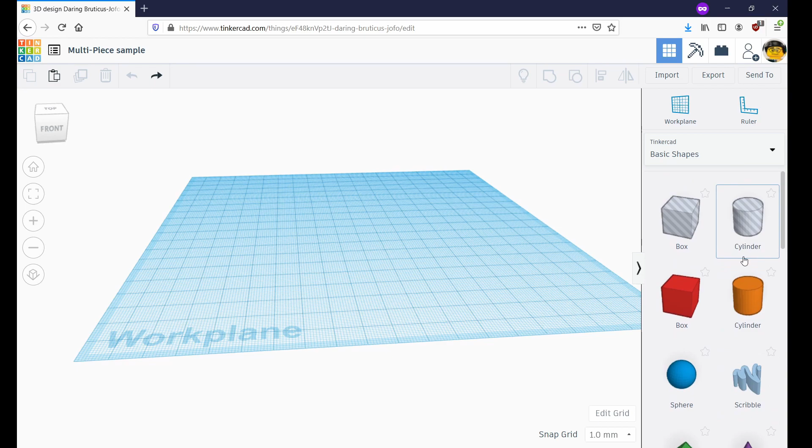This time we're going to start by inserting a cylinder. This cylinder will help me illustrate what we're trying to do today. Now on its own it'll print just fine, but if we decide to rotate this 90 degrees, you'll notice that there is a shadow now on our work plane.

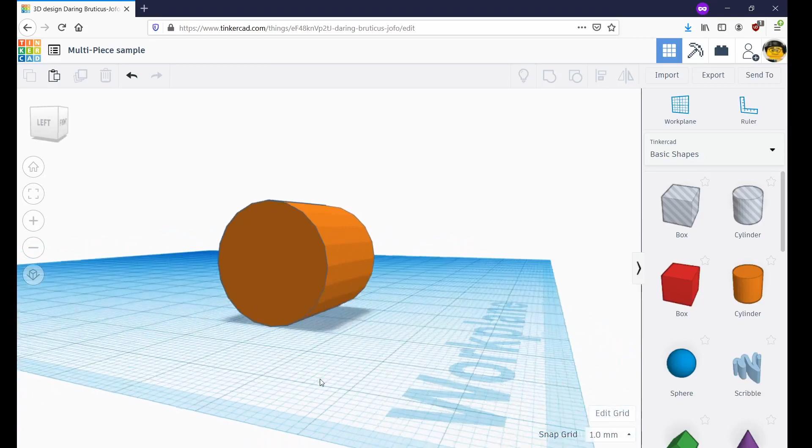This shadow denotes that if we try and print, we'll have some material hanging over. It may be tough for the printer to actually print this accurately. You'll notice the same thing when we insert the sphere. We have a shadow denoting that we have material essentially floating in midair.

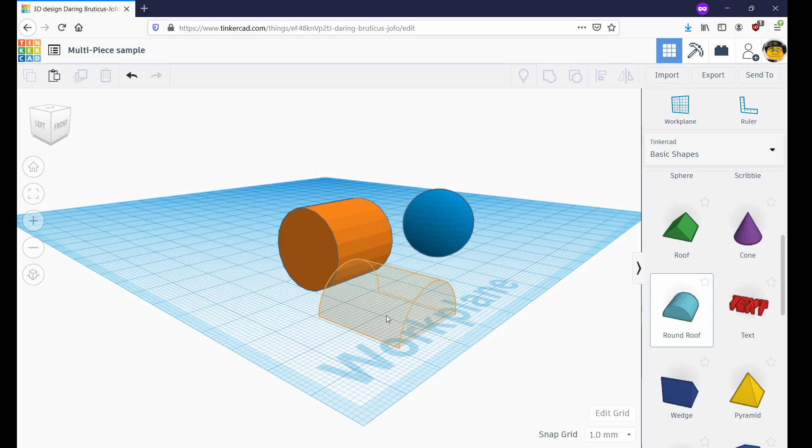The reason we get this is because 3D printers specifically print from the bottom up, one layer at a time, and we want to avoid having those shadows. So one way we can do this is by splitting our objects and then grouping them later on. For example, if I take two halves of this cylinder now, each half will have no problem printing. We just have to figure out a way to put them together.

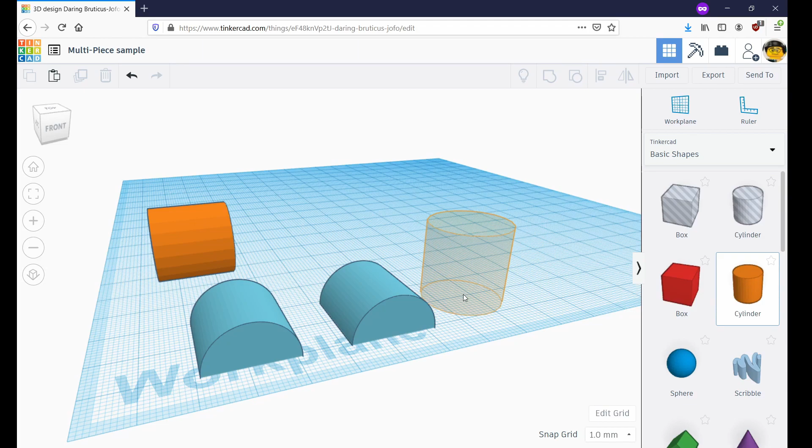The easiest way to do so is by creating an extrusion on one half of the object that will fit inside a hole that we create in the other half. So for example, let's insert this cylinder here. Now our goal is to make it just small enough to print, but we want enough to be able to squeeze into the other half of the object.

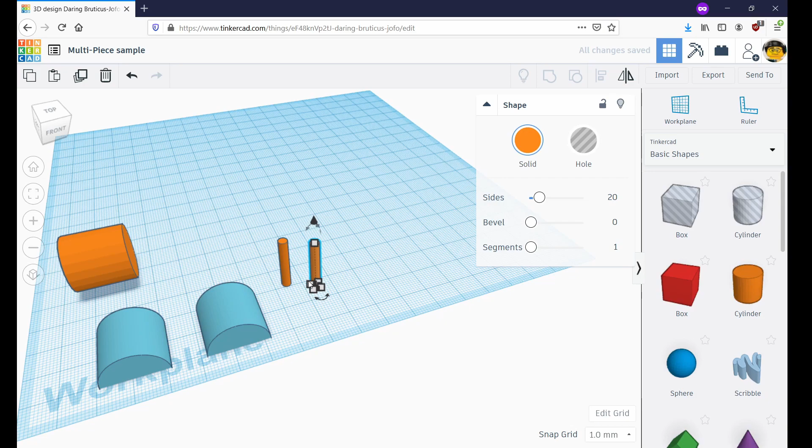So here I make it about 3 millimeters in diameter. Since we need to create a hole of equal size, I'm going to copy and paste this and just move it over to where I can maneuver it. Now I'm going to drag one over to one half of the object.

This one I'm going to use to create the hole, and the other one I'm going to use to create the extrusion. Now I don't want the extrusion necessarily to be on this side, but first we can use the alignment tool to make sure they are both centered on each respective half.

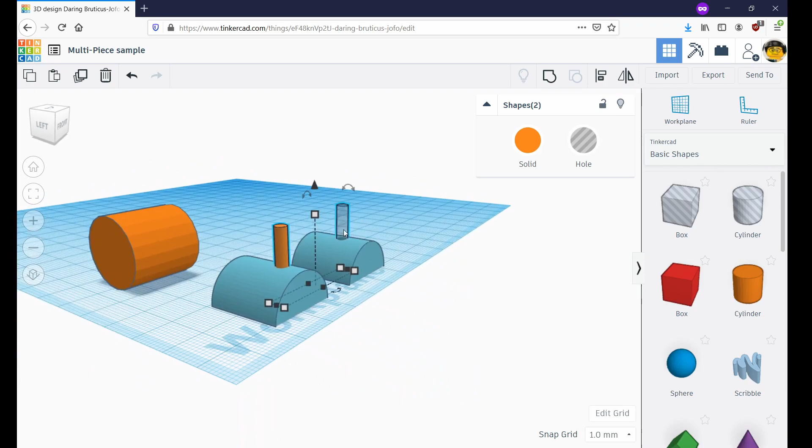Oops, this one decided to go way over there. Alright, let's bring him back over. And now that we have both selected, we can use the alignment tool and make sure they're lined up. So as you can see, several axes are grayed out. That means they are already aligned. So we should be good to go.

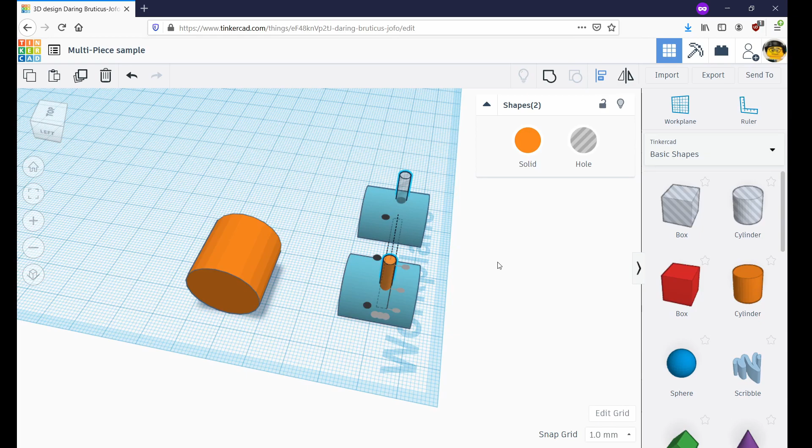Remember that you can always use the keyboard arrows to nudge objects in one direction or another according to your snap grid. And you can also change the snap grid to be more precise as you need it and simply change it back.

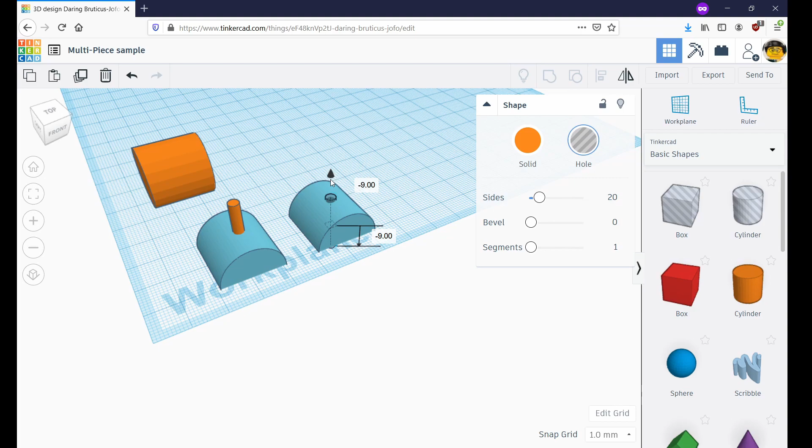So here we have one object that is now creating a hole in one half. We're going to shrink it down to where we actually want it to go. In this case, it'll create the hole on the bottom side of this half. And same with the extrusion. We want it to fit inside there, so we simply have to drag it down.

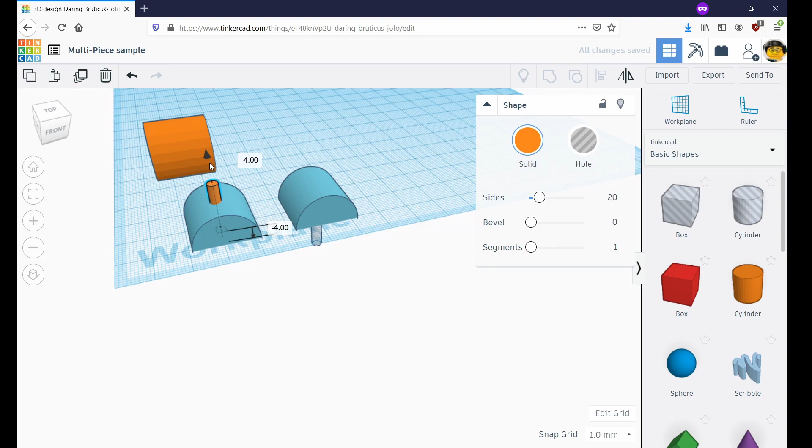So this is a good use of the snap grid here. You can simply use the keyboard arrows to make sure that they're both the same length from the bottom surface here, just to ensure that they'll fit.

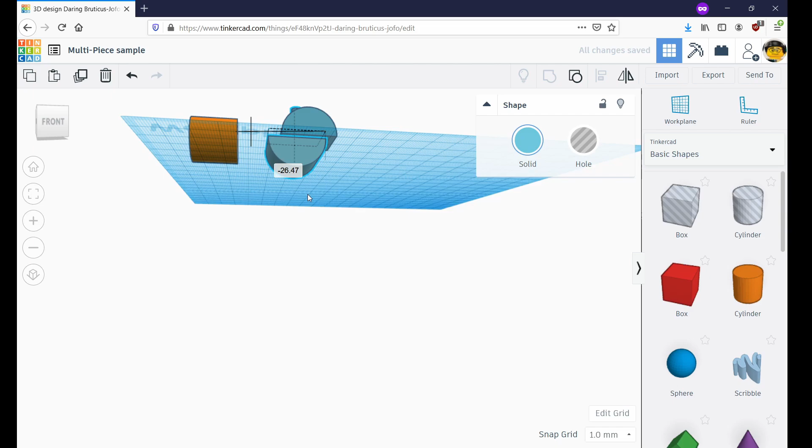Now you see this extrusion is just a little too long, but if we rotate this and move it over, you get a nice idea of what we're trying to do here. If we were to print this, we would likely have to sand down the extrusion in order to get it to fit inside the hole.

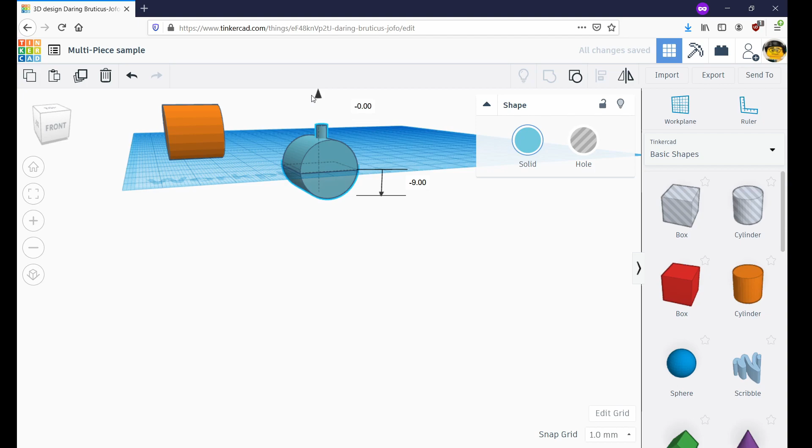But that is something we can deal with after we have printed it. So here you get a great idea of what we are trying to do, and you also notice that our extrusion is too large. Luckily, we can always undo any mistakes that we've made. But ultimately, we end up with the cylinder that's very much like our original cylinder, but in this case printed in a way where there is no overhanging material.

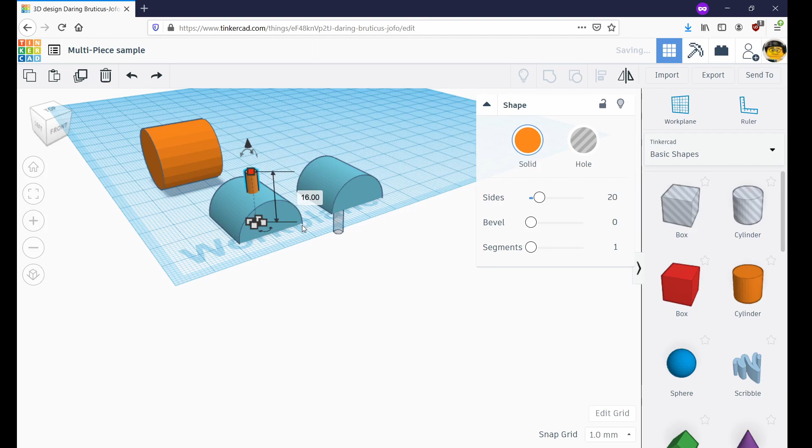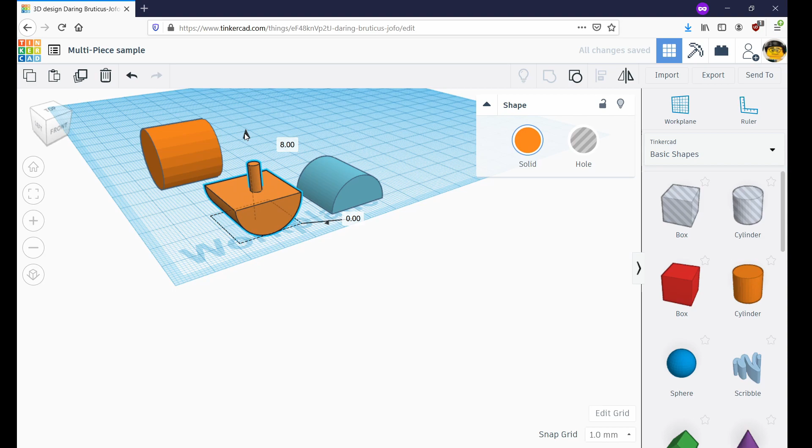So to give you a better idea here, we're going to actually just shrink this a little and move it over. So just simply rotate it and we're going to move it over, or we can place the other one up top. You'll notice that once I start moving these objects, those shadows come back.

That's a good warning for any potential printing problems. But alas, there is our cylinder yet again. And this time we don't have any extrusions coming out of the top.

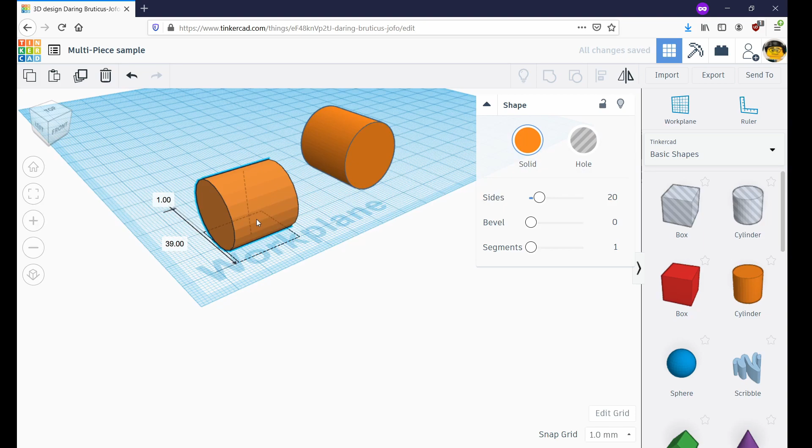So there you get a great idea of what we're trying to do and how we can go about doing it. We're not limited in the amount of extrusions or holes that we create, so we can do whatever works best for our unique object.

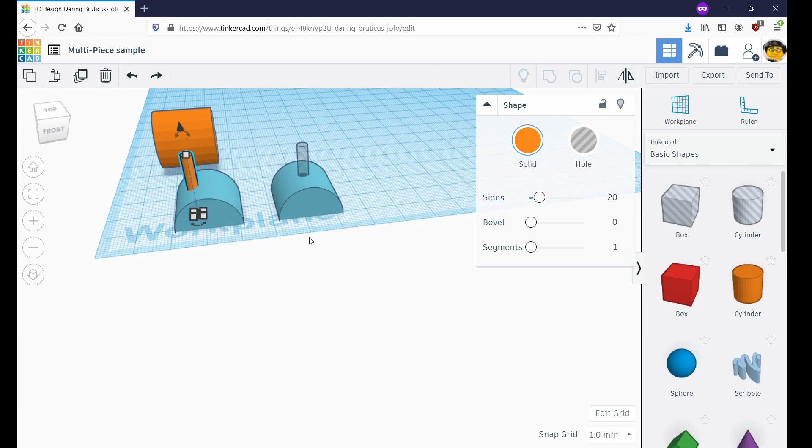Those of you with a keen eye, or if you've been following along our videos so far, you'll notice: wait a minute, Mr. Martin, that necessarily won't work either. Printing the extrusion introduces other complications with the print. And to that I say, you are correct.

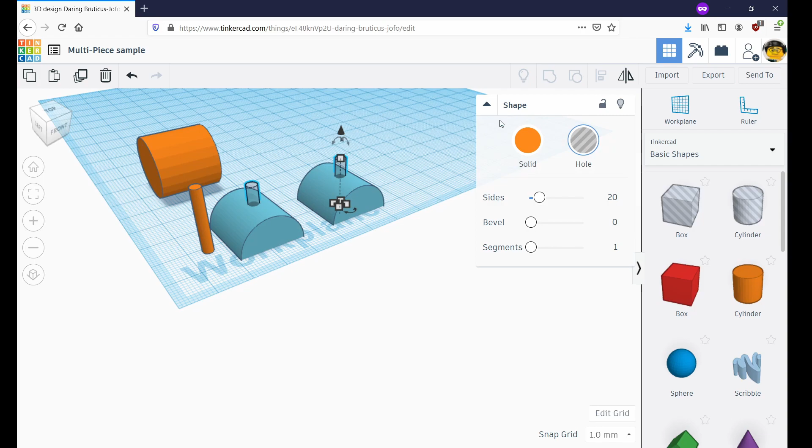So let's copy and paste our hole that we've created, and now we're going to duplicate this hole on both sides. One way to go about it is to simply cut out the hole from one object and then copy and paste it. But since we're teaching the process and not just the procedure, I'm going to do it one by one, so if you ever need to position these in a separate place, or add more for a larger object, you'd know how to do it individually.

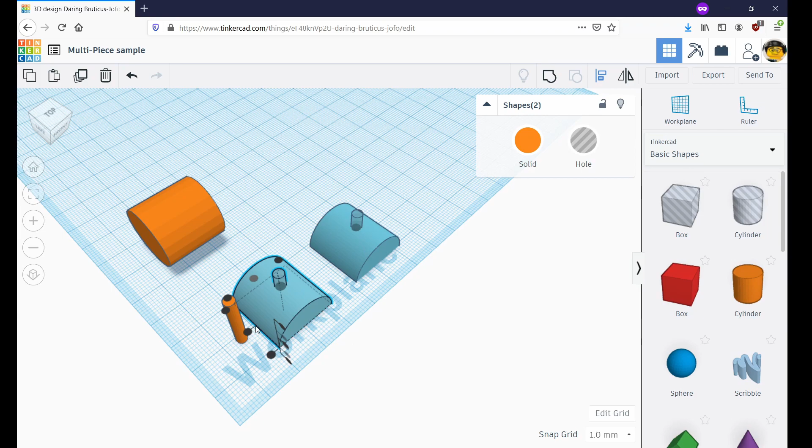So again, we can use the alignment tool when necessary, just to make sure it is centered. Here I did it for each pair of each object in the pair.

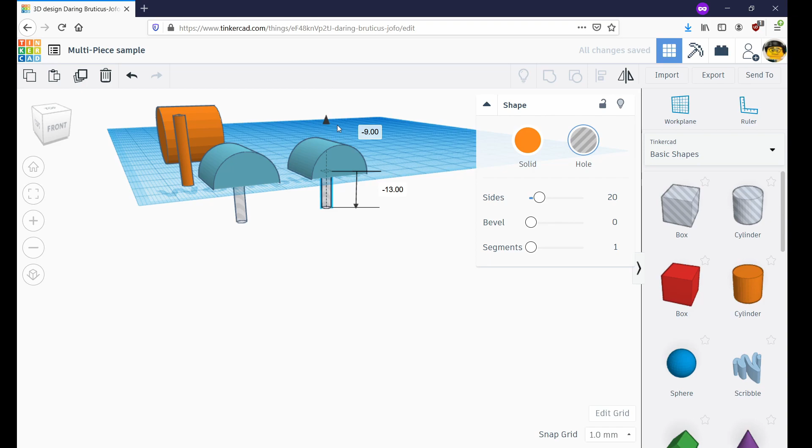Same as we did before, make sure you are extruding enough material from the middle. Now, since we are printing again from the bottom up here, the printer should be able to print this correctly, even though we technically do have material overhanging from that core we're cutting out. It is within the specifications of the printer to actually be able to layer that properly.

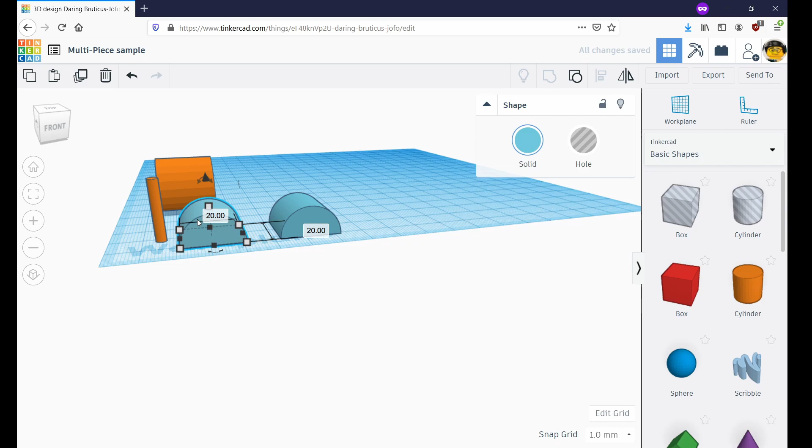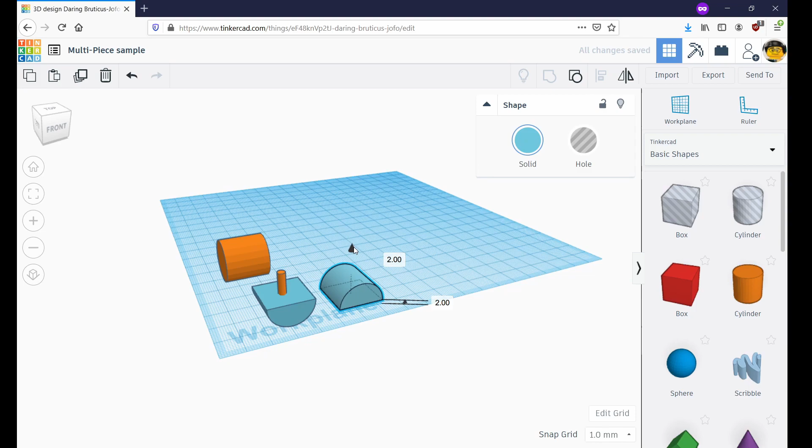So now we are left with our single connector with two places with which to connect it to. We can easily print all three of these objects as they are, and let me show you how they would go about connecting. Once we print these three pieces, you'd be able to simply slide them together and create a nice solid connection.

And once again, we see that we have our original cylinder shape, but we've created it in a way where it avoids some potential printing problems.

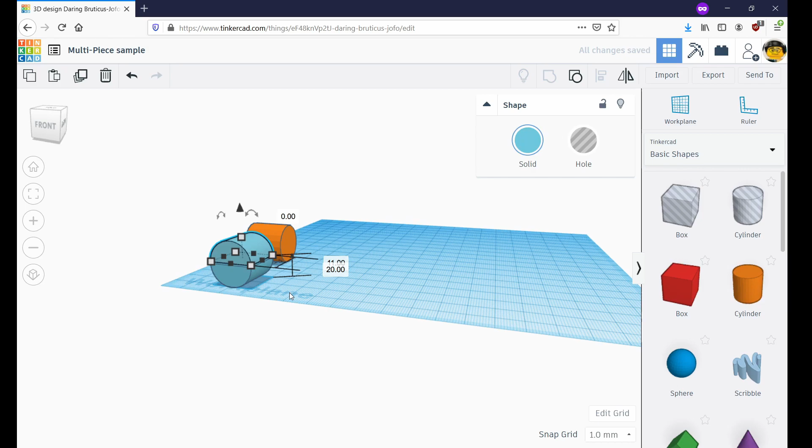And you can connect way more than just two halves of a cylinder, which we'll get to in a bit. But here, it's a good idea just to make sure your objects fit nicely and that you won't have any material extruding.

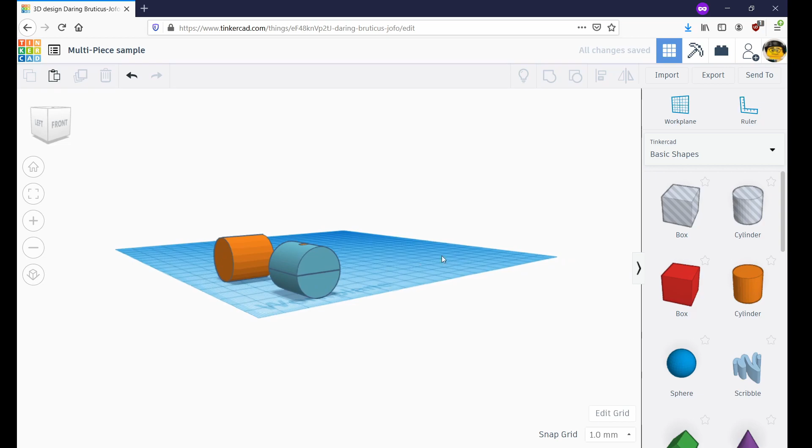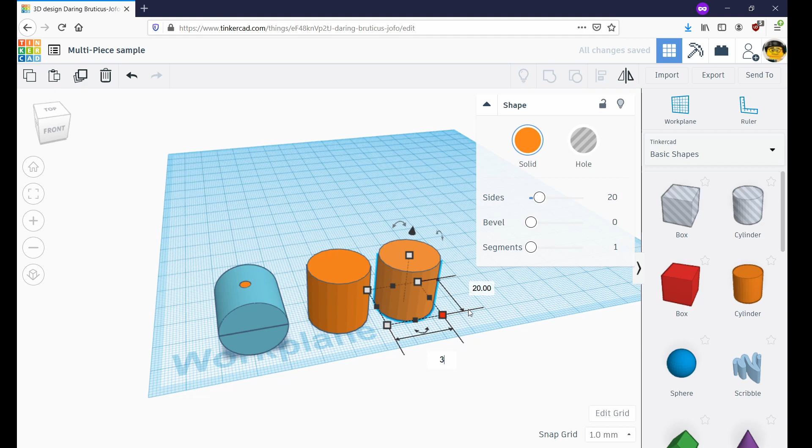So, for example, let's say you are trying to create an action figure of sorts. We can pretend that this large cylinder here is our body or our neck. Now, in order to place a head on this neck, we actually have to create our extrusion or our connector first. So we can copy paste the cylinder and create that material to extrude.

If we were to center this, you will notice that we should be able to print it as is once we group these two objects. We're simply layering more material on top of existing material.

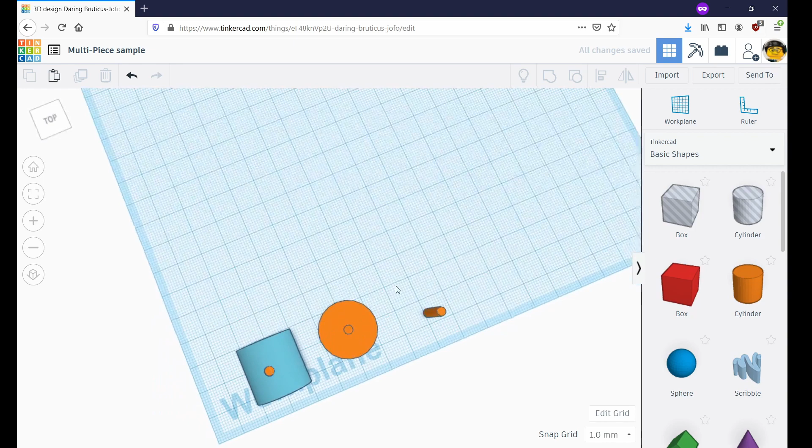Let's make sure to align it first so that we get our print just right. And there we have a centered object. So, next step, after we've adjusted this just a little bit, is to insert our sphere.

So now I've grouped what will end up being the bottom piece here. And by holding Shift and dragging on the corner, I can grow the sphere with the same aspect ratio.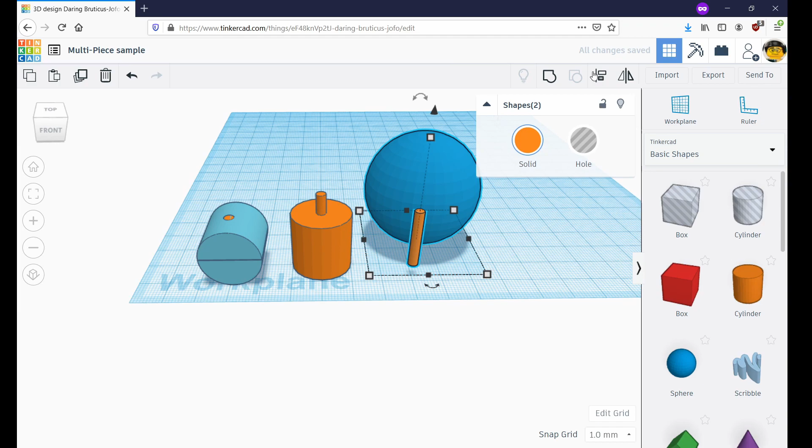So let's go ahead and center the other object we've created. This will be our hole. And you'll notice it disappears within our object. So I can just undo here, shrink it down, make sure to create a hole first before you can click on it anymore.

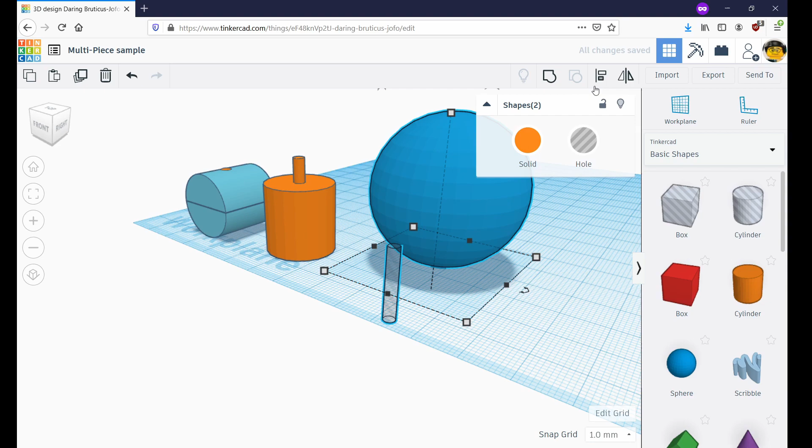We're simply going to realign it in the center. This time I'm not going to align it and make sure it is centered vertically—I want the extrusion hanging on the bottom. And now that I've had that, I can either align these two objects since I did group the first set, or I can simply use the keyboard keys to nudge it over.

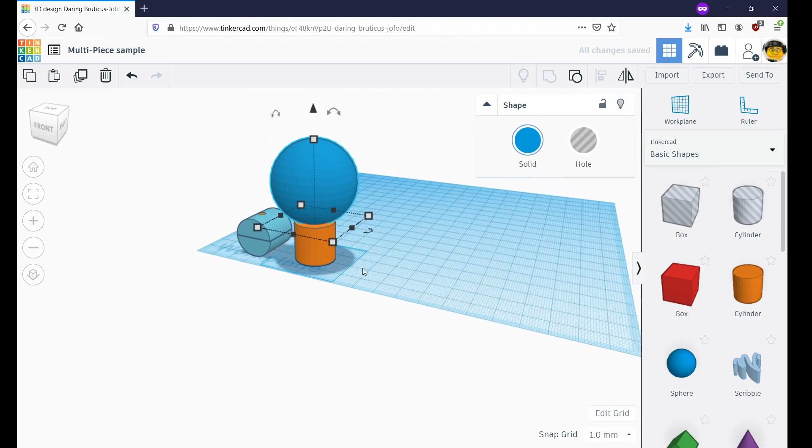Now, as you can see, once we've printed this, the hole that we created, or the core cut out from the sphere, should be able to print since it's not too big of a gap.

And if I create a hole, or if I use the hole option on the whole sphere, you can see right through it and see that our extrusion does indeed fit. And there we have the two pieces connected.

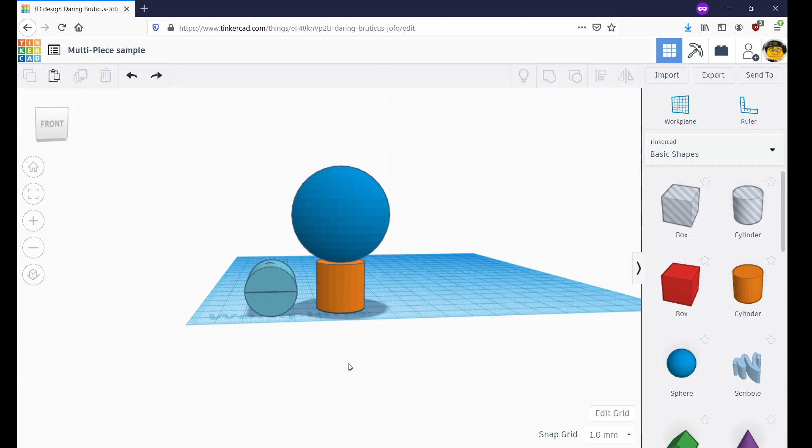And real quick, let me just show you how you would get it to fit slightly better than simply putting a sphere on top of a cylinder.

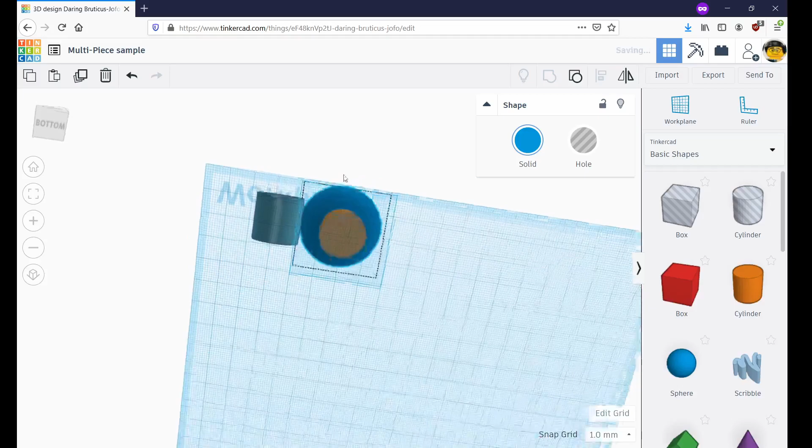Now, if we drag this down and actually use the hole tool here, notice I have already copied and pasted my sphere. So after I group these two objects and create a nice round surface, I can simply reinsert that same sphere, and now we have what should be a perfect fit.

Now, given the tolerances of the 3D printer, you won't always be able to get a curve so precise, but it'll fit better than simply a round surface on top of a flat surface.

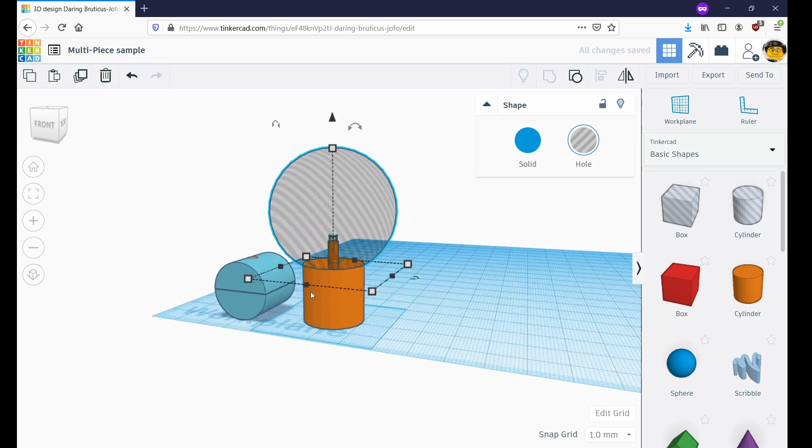But there you go. You now have the knowledge that you need to go about creating some very complex multi-object prints. Again, action figures is a good start, but the options are quite literally limitless.